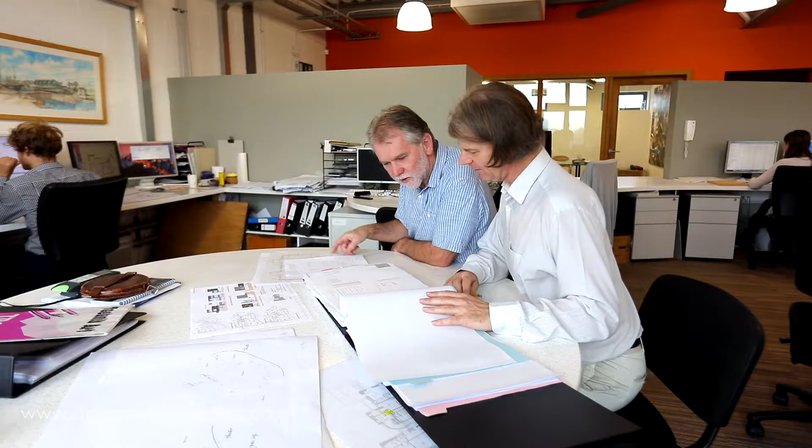We operate a studio environment where the youngest of our architects are in this studio space with us, and we think one of the successes of our practice is that we've got all these bright young things in the office, and we're all working together on a range of projects. We work across all sectors: education, commercial buildings, residential. They're very busy for us at the moment.

Some of our greatest successes have been with educational buildings, and the philosophy of getting to the bottom of briefing issues with clients and designing bespoke solutions is key to our success. We're not ivory tower architects. We really believe there are many ways to judge successful buildings, and it's not about just sitting up in your ivory tower dispensing design to people. It's actually about understanding their lives and understanding what the most important factors about their buildings are to those clients.

The client who originally instigated this project were the landlords of the quay. Essentially, they had an opportunity with the vacant site on the Piazza Terracina. They looked around for suitable co-development partners to bring into the project, and Mitch Tonks of Rockfish came forward. So this project is really a collaboration between two parties: the Jacobs family, who are the landlords of the site, and the Rockfish chain, of which Mitch Tonks is the leading person in that process. So we had to work with both the developer and the end user on this project to actually develop an economic, cost-effective solution for the developer, but at the same time meet the aspirations of the client.

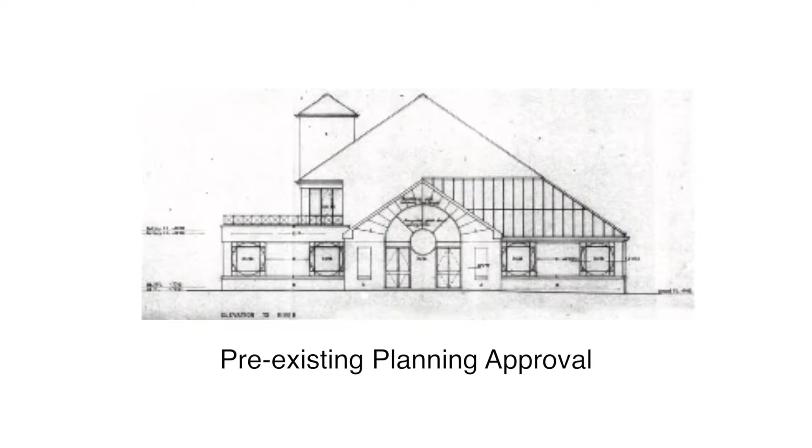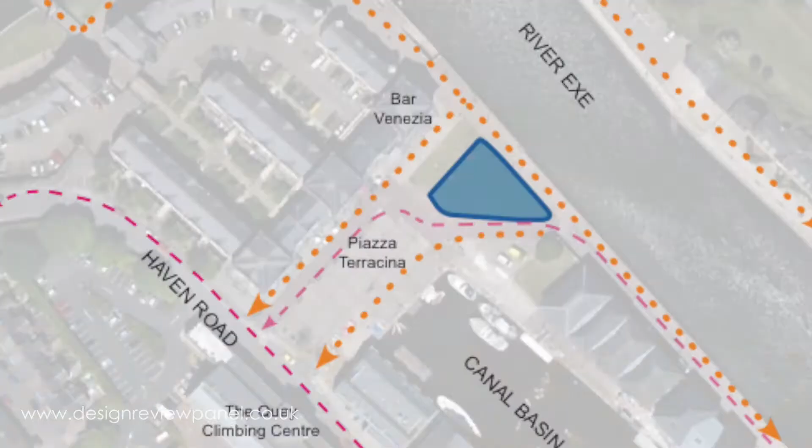When we first instigated this project, we were aware of the historical precedents because there was an extant planning permission on the site, but the planners were still quite nervous of the prospect of a building going on this site. So we saw the Design Review Panel as an opportunity to bolster our case and our client's case, because we knew if we could present a design of sufficient quality, we could get the support of the Design Review Panel, and that positive response would hold us in good stead with the planning department. So we really used the Design Review Panel, if you like, as allies in the process of actually getting a good piece of architecture through the planning process.

Our clients have really felt there's value in getting an unbiased professional expert opinion that the planners can use as evidence in supporting the case for approval. We feel that the panel is a real positive thing to suggest to clients, because the more weight we have behind our design—if we've got 6 independent peers, fellow architects promoting our scheme and telling the planners and the council what the positive aspects of the scheme are—that's a really powerful thing to be able to offer.

When taking projects to the Design Review Panel, to get the most out of the panel, you clearly can't be too fixed in your ideas. You've got to go there with open ears, but at the same time, you need to balance that against giving the panel confidence that this is a really good design they can get behind and support.

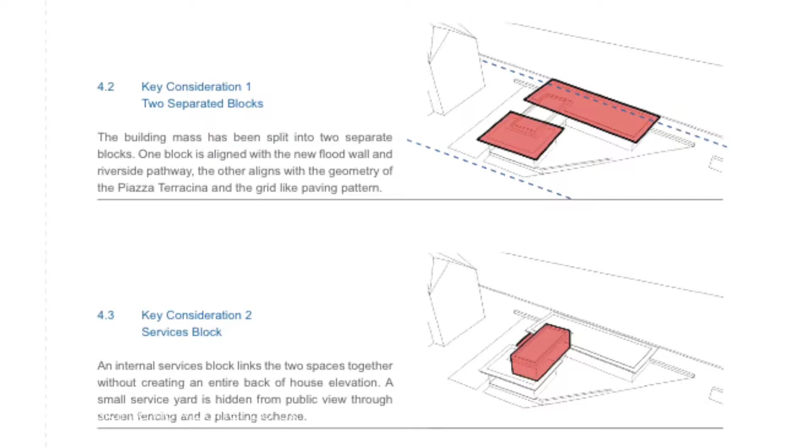The planning officers are actually pro-development. They're looking for reasons to approve these buildings, and we're helping them write their reports and their recommendations. If we give them that background information, it makes their job a whole lot easier. They've actually got the information to support their reports, their recommendations for approval. They can use the design review panel as the first draft of their planning report.

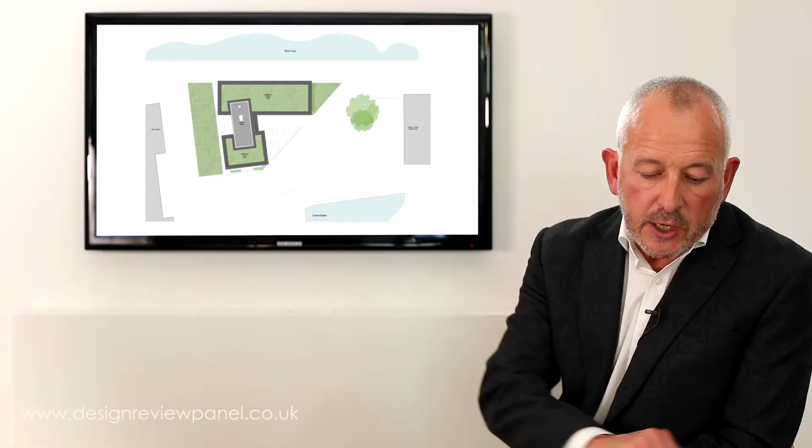Key constraints of the site include the need for an open aspect; the building must feel open. The glassy quality is about allowing people to look through the building and see the river and canal together. The service block, which sits in the middle of the building, is made of Heavitree stone, reflecting the local 18th century warehouse buildings with their red stone. We're using those materials evident around our building in the new design.

The site is quite small, approximately 500 square meters overall. We're putting a 274 square meter building into that site, which gives us a little space for outside seating. We'll provide additional seating for the Bar Venezia, who will co-use this site, with benching outside in the landscape.

We've thought very hard about the levels of the building, ensuring access for all. The outside terrace area of the new restaurant will slope gradually down to the existing piazza level, so that we can have wheelchair access to the building.

The materials have been very carefully selected. We want this glassy building to look quite neutral in appearance. It won't be reflective glass, but a natural colour glass so that light moves through the building and you're aware of the surroundings. We don't want it to be hugely reflective, so we've taken great care to ensure the glass type we specified and the details all work with this.

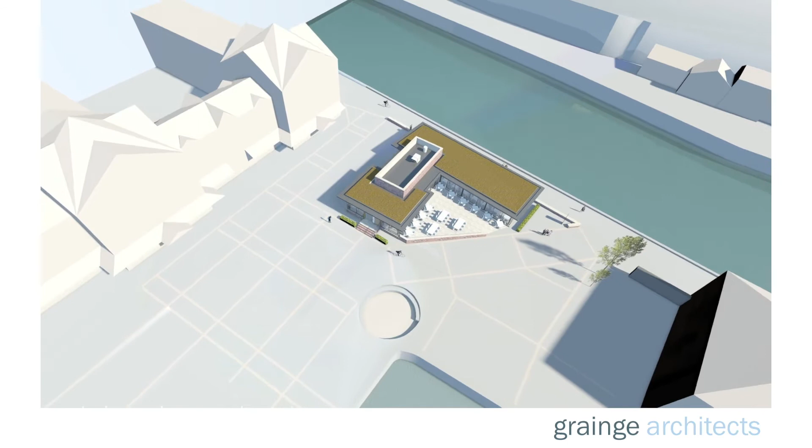This is a SketchUp model we prepared for the Rockfish Restaurant. This aerial view from the south shows the outside terrace area and the main entrance to the new building. You've got the backdrop of Colleton Crescent in the rear of the picture, and we're panning round past the old railway turntable and the Piazza Terracina.

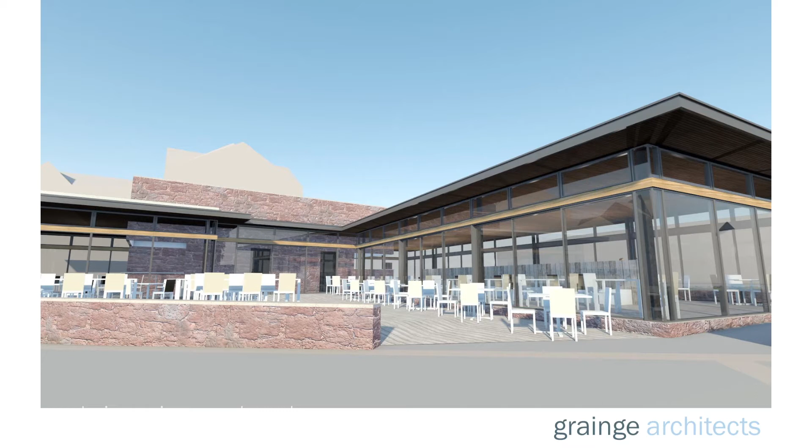We're now going up the disabled access into the building. You can see the ramp from the piazza, the wholly glass elevations of the building, and this is the riverside walk where you can look down into the River Exe.

People using the restaurant will sit in this glass elevation looking out onto the river, watching the boat traffic, the rowers, and people generally using the river. You can see the electricity building in the rear of this shot.

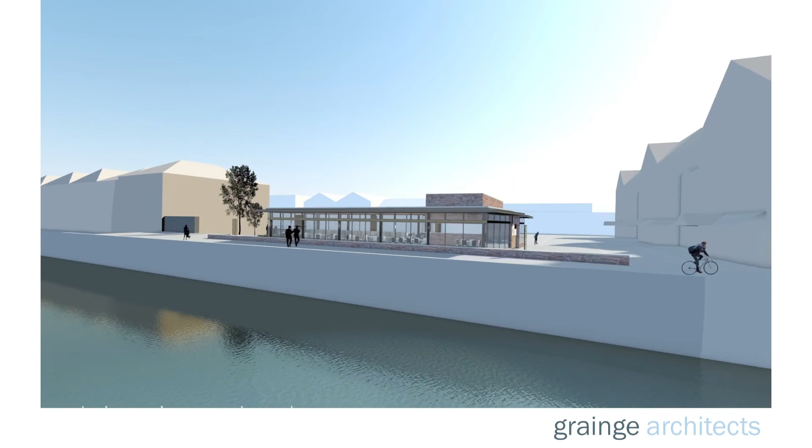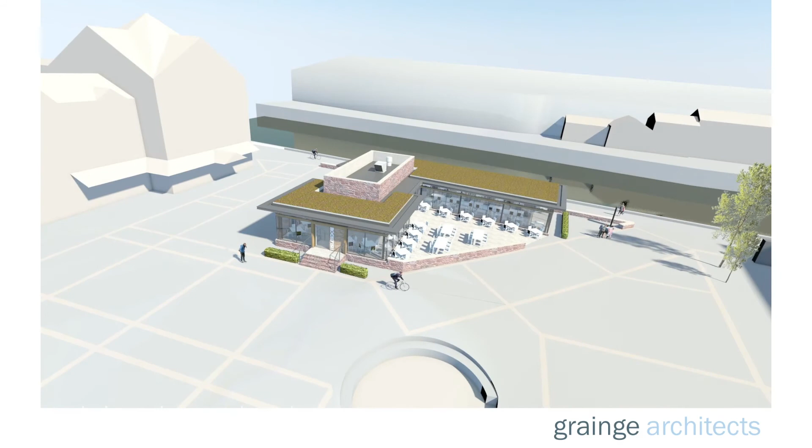Finally, we come up and look down on the scheme, and you can see the two grass roofed areas where the indigenous wildflower roofs will be placed.